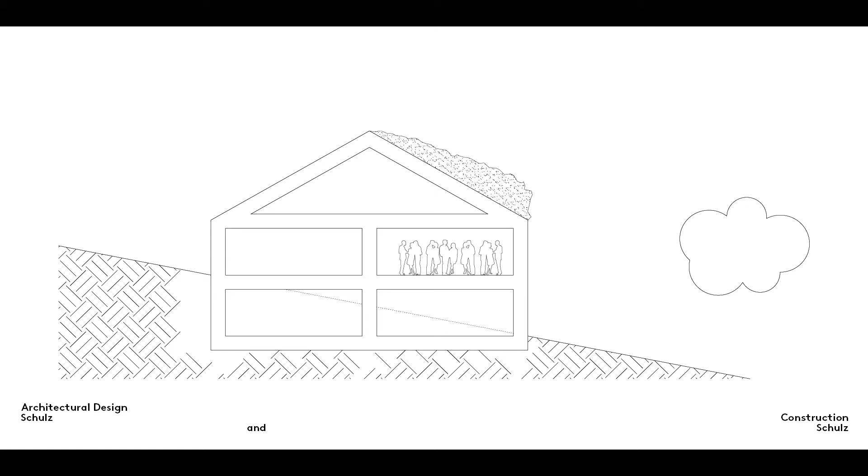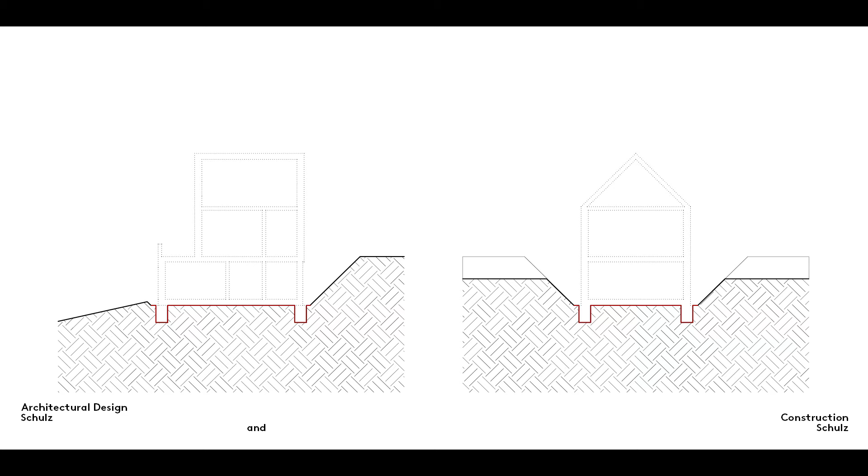As we saw in the previous Structural Members series, loads are transferred from one building component to another, and so the contact surface between these components has a bearing function. In the case of foundations, this contact surface forms a critical interface between the structure and the ground beneath it, the structure-ground interface. The forces at work in the foundations act on this structure-ground interface. To satisfy the equilibrium of forces principle, the forces at work in the ground must therefore do the same. If the structure of the ground is sufficiently strong, this is exactly what happens. However, it's frequently necessary to apply force to the ground, that is, to compress it to achieve this equilibrium.

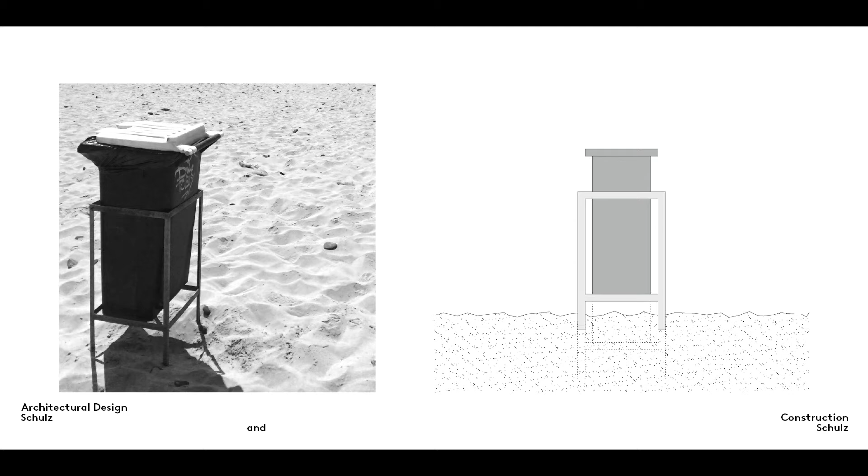As we've already seen, the sand beneath this litter bin is easy to compress, and so the litter bin is in danger of sinking into it. To prevent this, the litter bin could be placed on a concrete slab. Rather than being concentrated in four thin legs that tend to sink into the sand, the load would then be distributed throughout the concrete slab, thereby reducing the pressure on the individual grains of sand. This is the fundamental principle of foundations. They must be large enough and so distribute the relevant loads over a large enough area to ensure that the ground is able to exert a counterpressure.

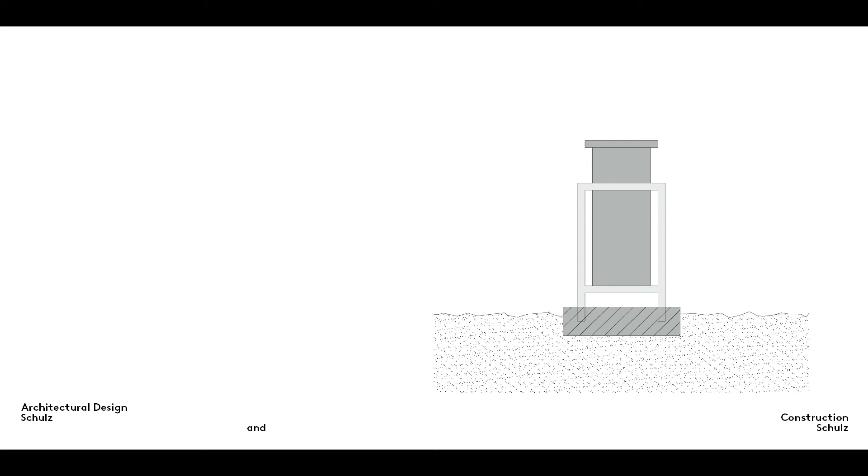How big this counterpressure must be depends on the allowable ground-bearing pressure for which the foundation is specified. Unless foundations are laid on solid rock, a certain amount of compression is required to achieve this bearing pressure. The ground needs to compact before it can counteract the load exerted by the foundations. This means that the structure-ground interface shifts and the building sinks very slightly. It settles, in the technical jargon. However, settlement must be both minimal and even.

Once the ground has compressed to the point where its counterpressure corresponds to the pressure exerted by the foundations, settlement is complete. This is exactly what happened beneath the bell tower of Pisa Cathedral, for example, though here settlement was clearly far from even. Uneven ground conditions can cause uneven settlement, as with the Leaning Tower of Pisa, which is believed to have been sited on the edge of an infilled harbour basin.

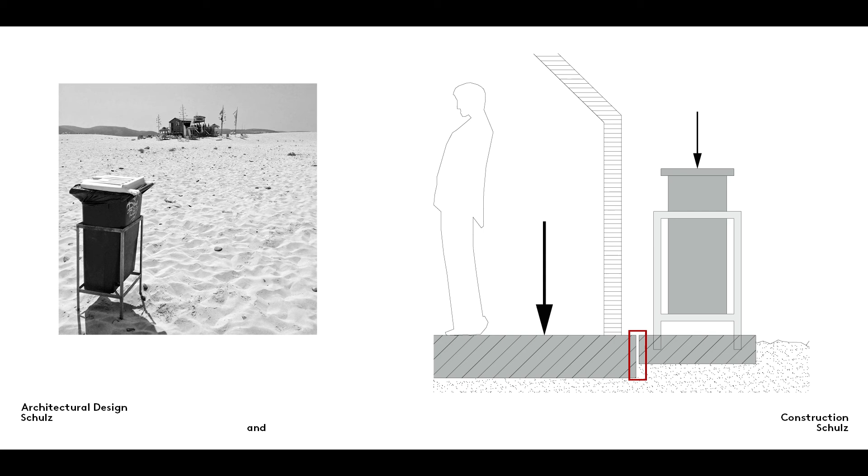Far more frequently, however, settlement is caused when buildings transferring different loads into the ground are constructed next to one another. This is what would happen if someone were to drag our litter bin to a beach bar and set it against the rear wall. Two such structures are normally separated by a joint that runs right through the foundation. This point was also covered in our Elements of Architecture film series.

If the load-bearing capacity of the ground is insufficient, laying deep foundations and improving the soil can help. Piles can be rammed or bored into the ground, transferring the loads to the ground around them via their outer surfaces by friction or down to load-bearing strata at the end of the pile. Alternatively, it's possible to improve the allowable ground-bearing pressure by replacing or compacting the ground beneath the foundations.

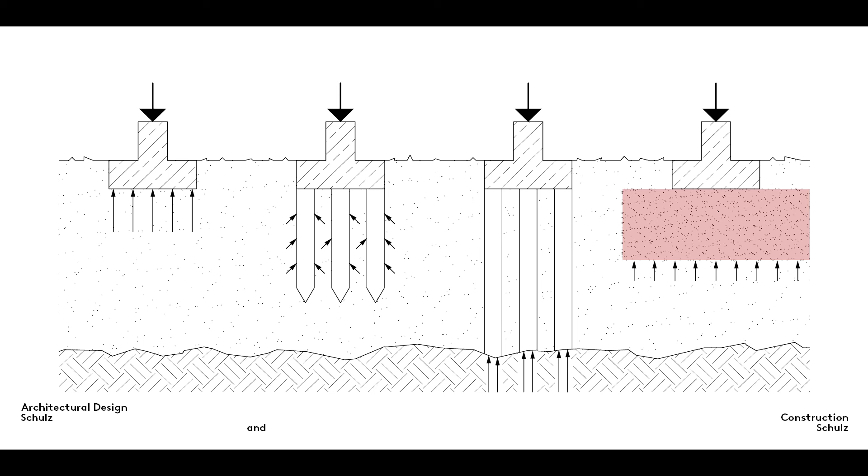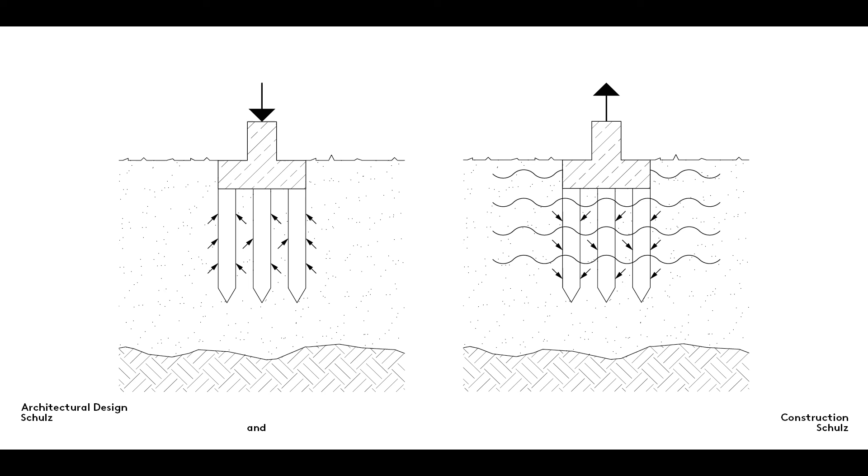In some cases, the structure-ground interface may be subject to tension rather than compression forces. This typically occurs where groundwater or floodwater close to the surface causes the building to lift. One way to prevent a building from lifting is to reverse the effect of bored foundation piles so that the surface friction of the piles acts against the tension forces and so prevents the structure from being pushed upwards.

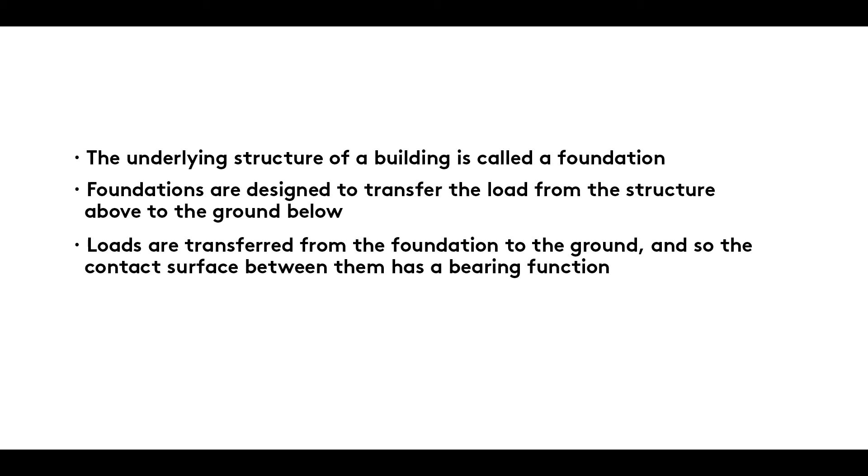Summary. The underlying structure of a building is called a foundation. Foundations are designed to transfer the load from the structure above to the ground below. Loads are transferred from the foundation to the ground, and so the contact surface between them has a bearing function. This contact surface is known as the structure-ground interface.

Please take a look at the second film in our Foundations series. In it, we discuss the preparatory work that has to be carried out before foundations can be laid.